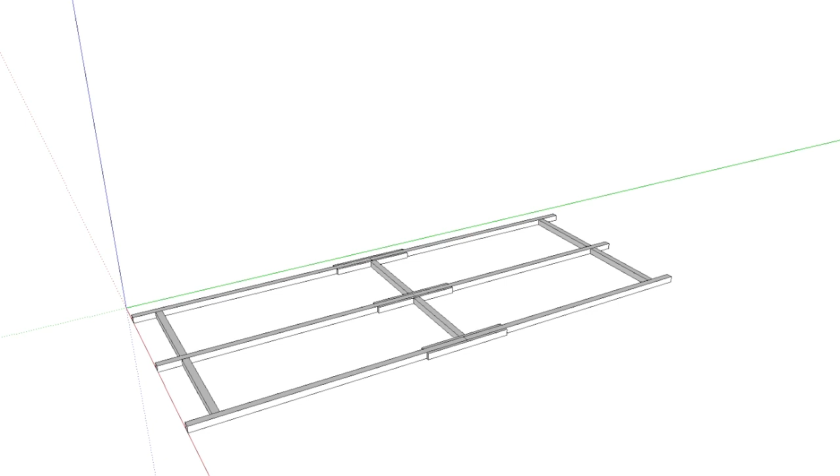So let's dive in. Like I said, the floor is already done. So what I'll show here is, I've got a skid foundation, and on top of that is a joist system and a plywood subfloor. So basically this is where I'm starting from.

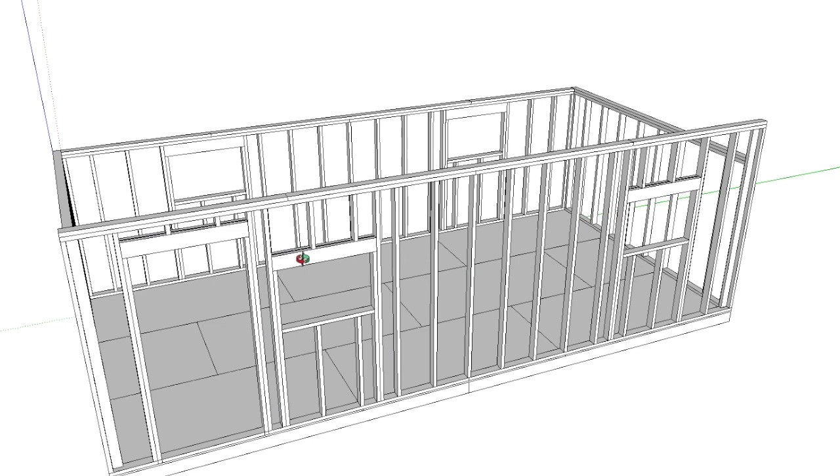So the first step to be done here is the wall framing, which there's a lot there, but I think it's pretty standard stuff, pretty straightforward. This is all 2x4 construction. You've got sill plates, double top plates, or a top and a cap plate. They overlap on seams so that things are jointed, so that it's stronger. Pretty standard openings for doors and windows here. Standard header construction for doors and windows: a piece of 2x6 on either side with a piece of 1/2-inch plywood sandwiched in between.

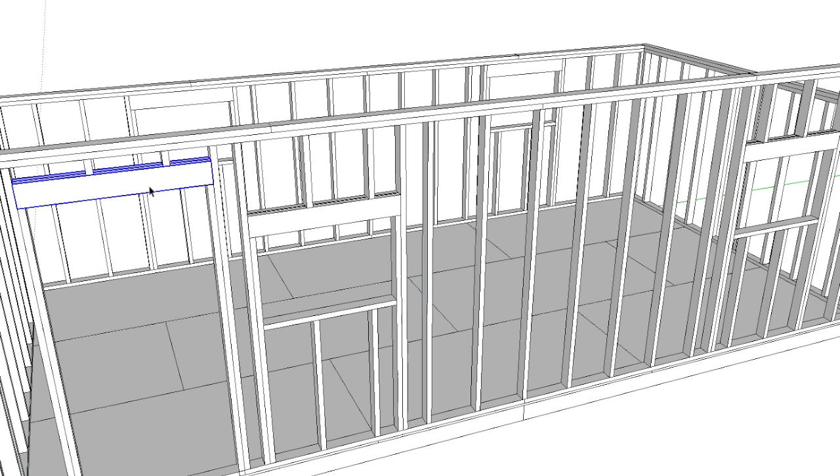Above and below, when necessary, you've got cripple studs above and below windows. On the short wall over here, I actually put the header right up against the top plate. Here's my door opening, kind of the same header. I've shown these — these are the rough openings for the doors and windows I've purchased. But other than that, I think it's pretty standard framing.

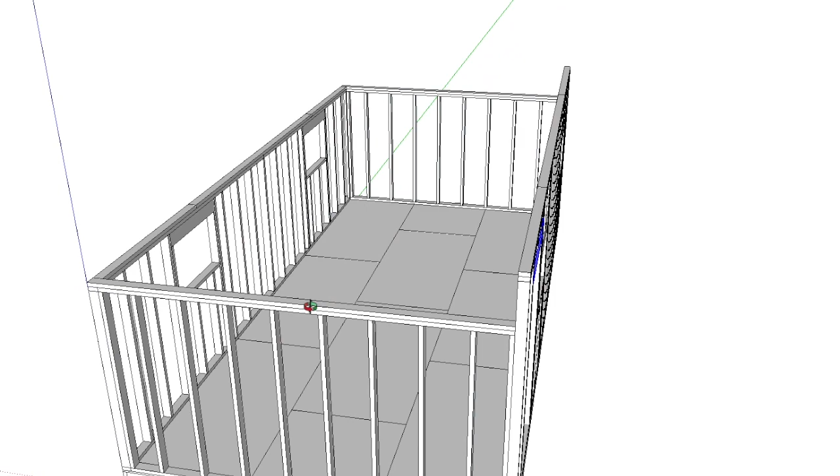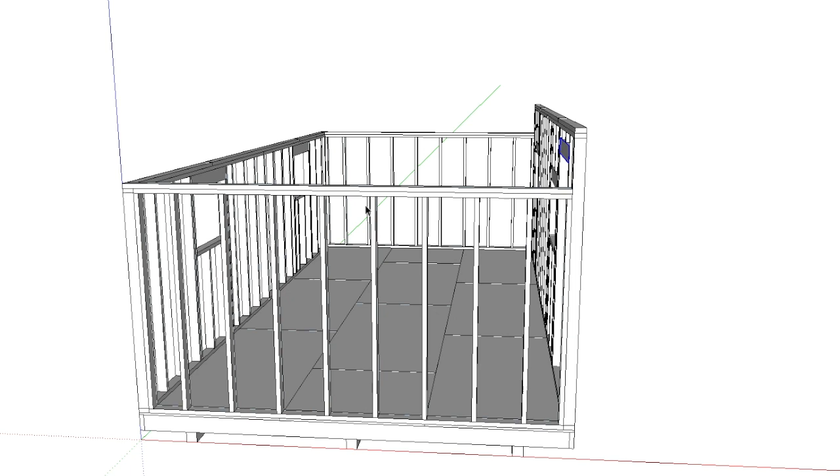I have chosen, this will be a 12x24 shed on the floor. This will be a single sloped roof. So what you can see here from the side is I've got one high wall, which will be the front wall, and the back wall is low, and there'll be rafters running a single slope across. To do that, again, I think there's multiple ways to do this, but I went with 3 short walls that meet up with that one tall wall, instead of trying to make these side walls step up. That introduces several angles and things that I didn't want to deal with. So I went with 3 short walls that meet up with the tall wall.

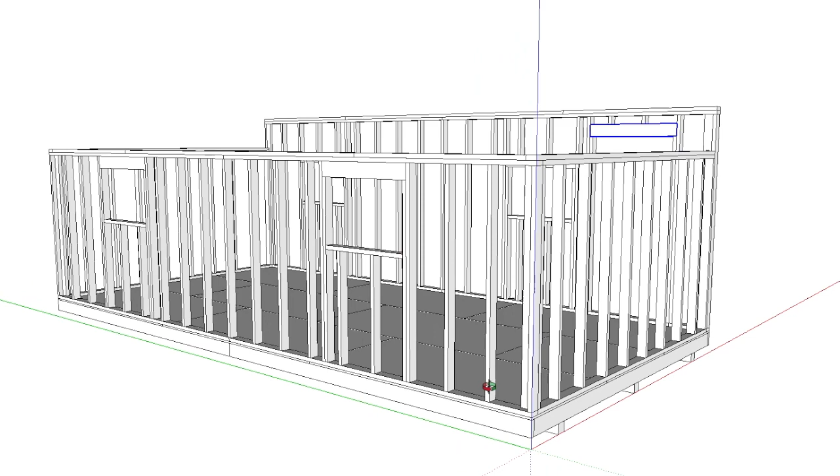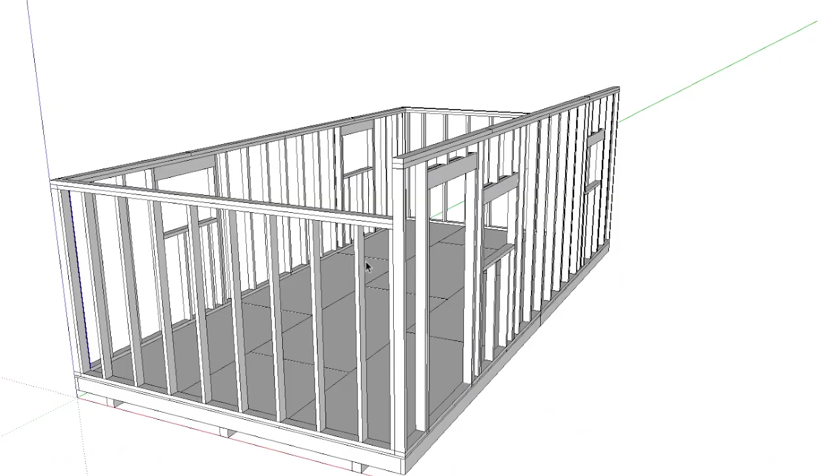There's a little bit of detail in the corners that SketchUp helps people like me visualize, that I hadn't thought about. When 2 walls meet, when you frame out 2 walls, how do you really connect them, and how do you have a nailing surface on the inside? So there's actually, I think you can kind of see it here, an extra stud thrown in on this wall sideways so that this end wall has something to meet up with and nail to, and it provides a nailer on the inside of the room. So there's just a couple little details like that, but again, I think that's pretty standard stuff. If you know anything about framing and if you've read any of that stuff, there are other ways to do some of this again, but I think it's pretty standard the way I've done it.

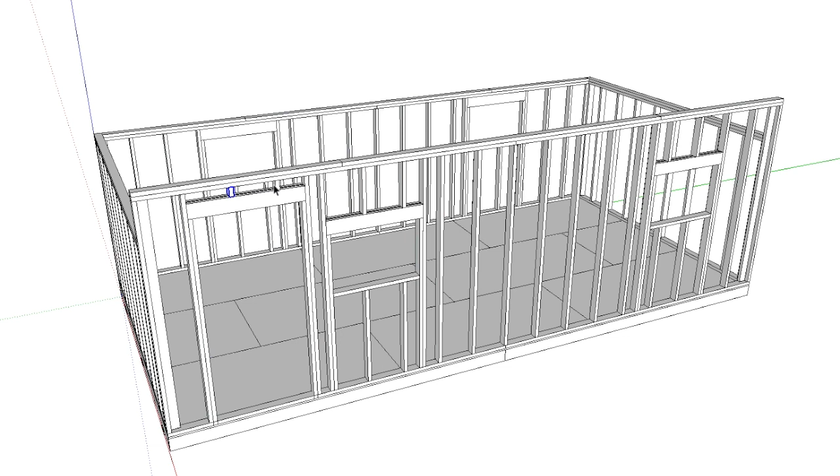So that should cover it. This would all be put together. You've got king studs, jack studs — jack studs come under the headers. Cripple studs, like I said, above and below door and window openings. All pretty standard terminology, I think.

This will be all put together with nails from a nail gun, hopefully to speed that up. I've got a nail gun for this job, but I've never actually used one before, but that should hopefully speed a lot of this up.

But that's it. This is a 36-inch wide door. These windows are 3 feet wide and 2 feet tall. Everything framed pretty standard, I think.

After that, I will put on some wall sheathing. Again, these walls will actually be built kind of laying on the floor and then stood up. That's a pretty standard way to do that. And even the sheathing, which I'll show now, which is 1/2 inch OSB, will be put on before they're stood up on the ground. They'll be put on and then stood up.

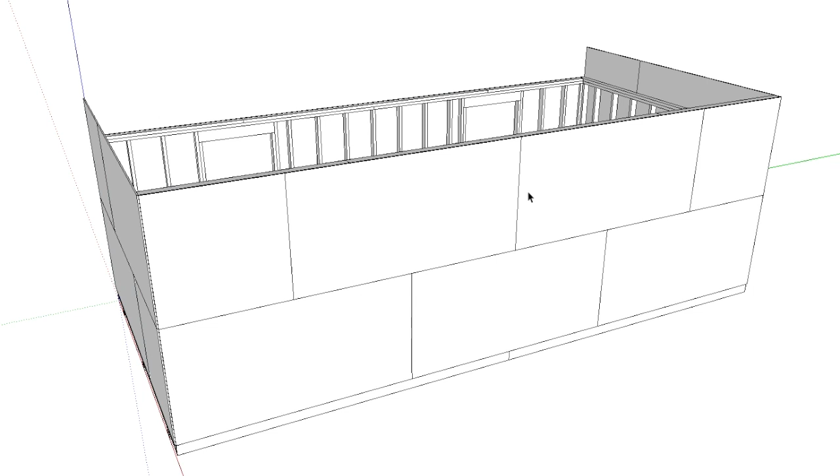I haven't shown all the cuts necessarily down the sides here, but this is how the sheathing will go on, and then after the fact you can actually cut out the openings for the doors and the windows. But that's how the sheathing will go on before you stand it up. So I'll take that away, but imagine that's there.

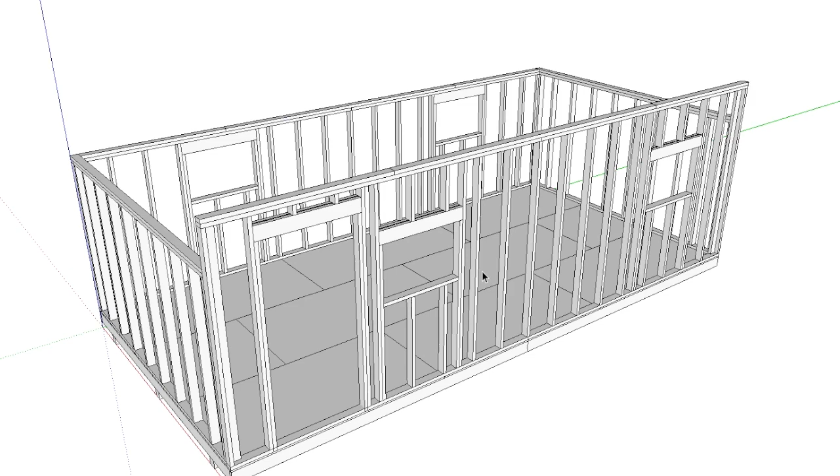After things are stood up and the sheathing is on there, I'll be putting house wrap, either a Tyvek or some other brand of house wrap around the whole structure. And next would be the roof framing.

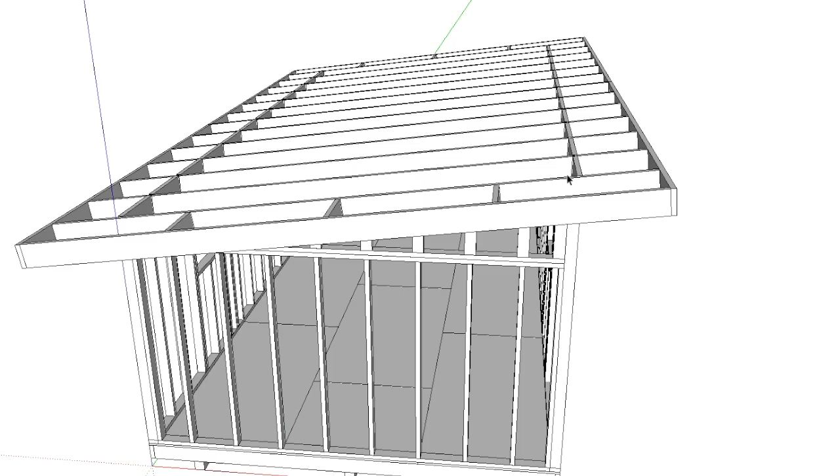Essentially the roof framing is a lot like the floor, with a few differences. Again, I said single slope roof. The floor is 12 feet in this dimension. The roof is going to be 16 feet. So to give about 2 feet of overhang on either side, it'll be slightly less because it's tilted like this, but 2 feet of overhang in the front and the back.

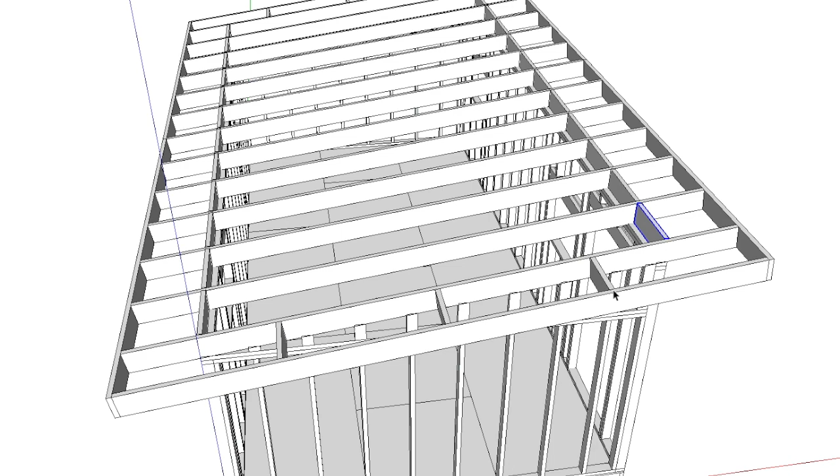That's actually why you can see this blocking that goes along the wall here. It's to close up that gap that'll be created by the rafters above the wall and before the roof sheathing. So there's blocking down there. There's some blocking added to the ends to kind of support this special rafter. I think one name for this rafter is a fly rafter or flying rafter. As you can see, all these rafters are supported by the front and back wall. They sit on the front and back wall, and they'll be notched appropriately to sit on those top plates.

But the end rafters are special. They just kind of hang out in space. So they're supported by the fascia board that runs kind of around the whole perimeter. They're squeezed in there, and this extra blocking here to support them hanging out in space there.

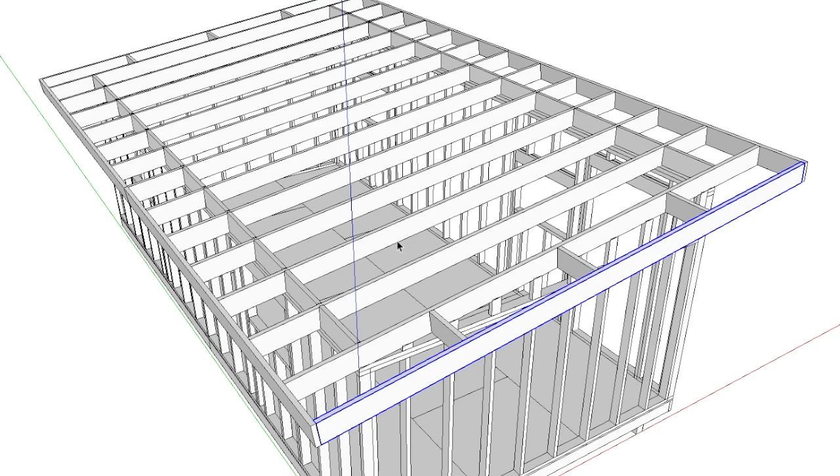But that gives me a total of a 16-foot roof from front to back and 27 feet from side to side. Again, the floor is 24. I'm going about 1.5 feet of overhang on the sides to give a total of 27. That was sized on purpose to fit the metal roofing panels that I'm going to add on the roof. But again, this is 2x8 framing here for the roof, and it's at 24-inch on center, which should be enough support for this roof.

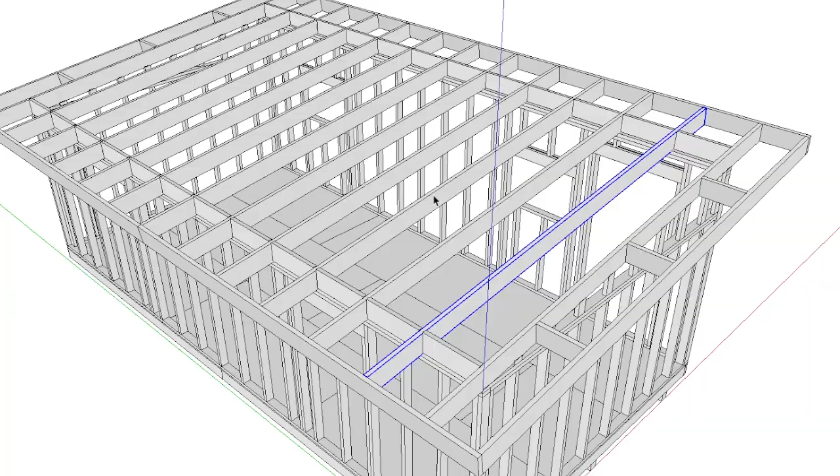Pretty standard, a lot like the floor. There will be hurricane ties where these rafters meet the walls. So those will all have hurricane ties. That's the fastening mechanism, so it should provide a lot of stability there, because we do get some pretty serious winds here. On top of that framing will be sheathing on the roof.

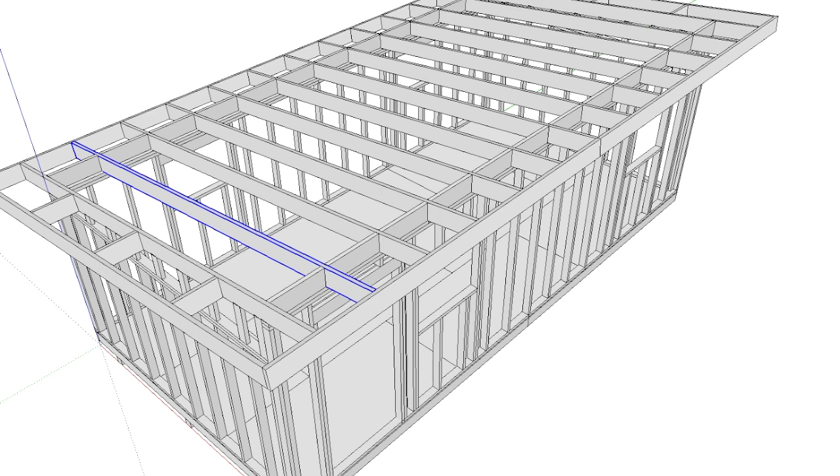This is actually going to be 1/2 inch plywood. It's, again, very similar to the floor build, just tilted. One difference between this and the floor is there won't be blocking for all the seams. On the floor, I put some blocking so that every seam of every piece of plywood would be supported. On the roof, instead, it's done a little differently.

I use something called either sheathing clips or H-clips between these panels. In one direction, the direction that the rafters run, all these seams will fall on a rafter and they'll be supported. But this other direction, each of these seams is kind of unsupported between the rafters, so there's 24 inches of kind of unsupported space here.

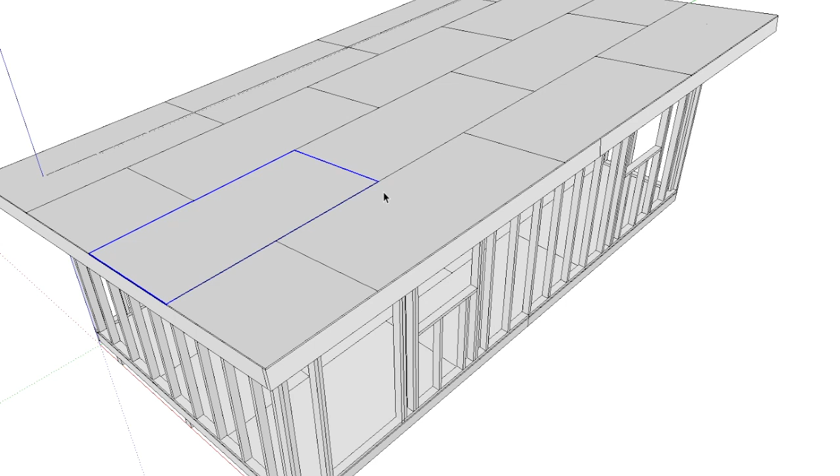So those clips that I'm talking about serve two purposes. One, they provide a little support in that unsupported space, and they also space out these panels so that they can experience the expansion and contraction that they do as with the weather. So there are clips that go between these panels to give that extra stability and expansion and contraction space. So that's one difference between the roof and the floor. But other than that, the roof and the floor are actually pretty similar structures.

So that covers the roofing framing. On top of that will be tar paper or a synthetic. I'm actually using a synthetic paper on top of this to go underneath the metal roofing that will go on top.

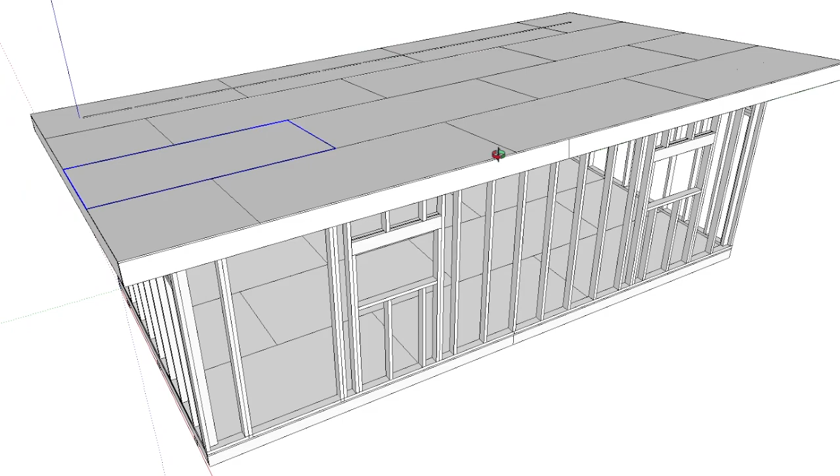One little detail: because I chose to make 3 low walls meeting up with this one tall wall, I've got some additional cripple studs here, I think that's the right name for them. They're not really there for support, since there's a rafter running on top supported by the front and back wall. They're really more there to nail to—nailers for the sheathing and siding that will go on the outside of the building.

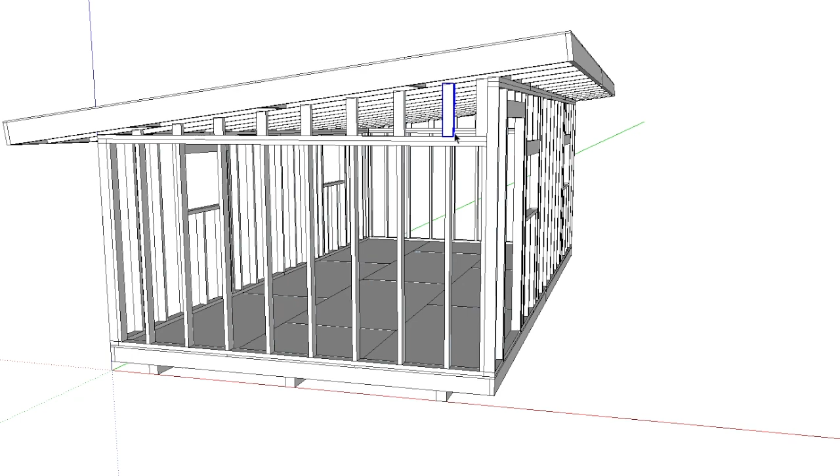That's how I've kind of bridged that gap. If I didn't put those there, there'd be a big empty space with nothing to nail to, so those are just there as nailers. They'll have to be cut to the appropriate angle to meet up with the rafter, but I think that's pretty much all the detail necessary there.

Some statistics: that roof is 16 by 27. The math says you can collect about 0.62 gallons of water for every inch of rainfall for every square foot of roof surface. Doing that math, with our average rainfall ballparked at 12 inches a year—it's anywhere from 11 to 13 or 14—that gets us about 3,000 gallons, roughly, of water off this roof over the course of a year.

So a nice size, 2,500 gallon or so tank on the side of this thing should give us a good chunk of our water needs collected off this roof. That's another purpose of this shed—it's going to start out largely as a storage shed to keep some of our things dry before the house is built, and it'll also serve as a workshop and other miscellaneous things.

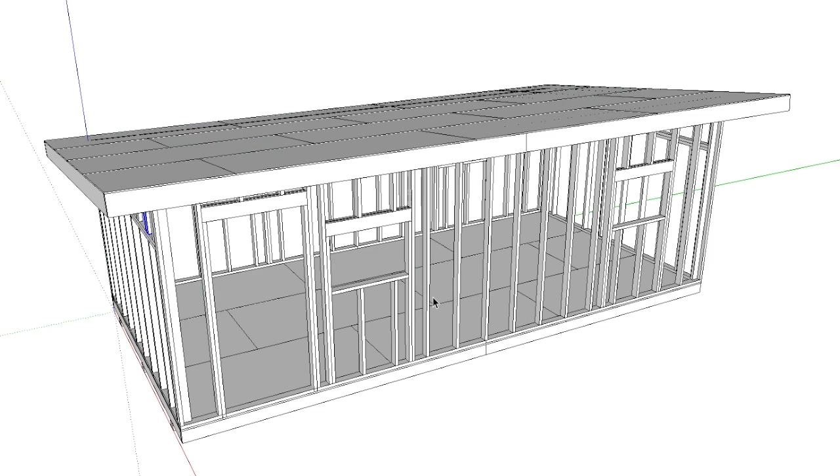Someday down the road, when the house is built and we pull some things out of it, it'll become maybe more of a serious workshop, and who knows what else it could turn into. Hopefully it'll last a long time, built this way—I've chosen pretty standard building techniques that should be durable and strong. So hopefully this will last a while, but feel free to comment on anything you see that's out of whack there. I'm just checking my notes to see if there's anything else to cover.

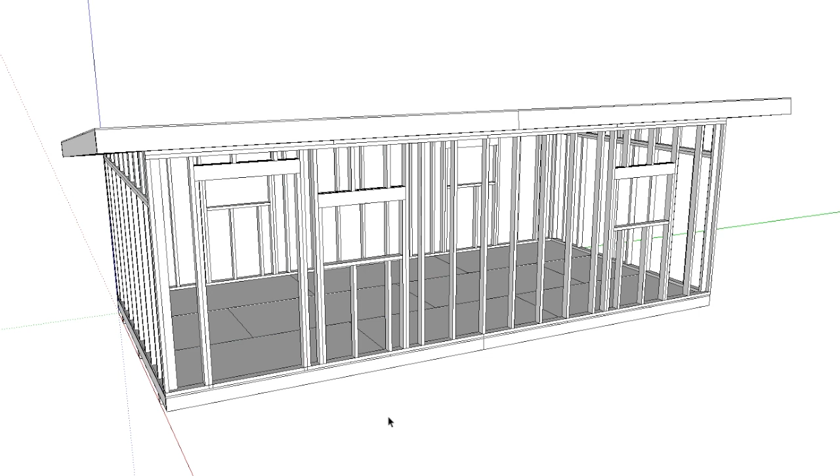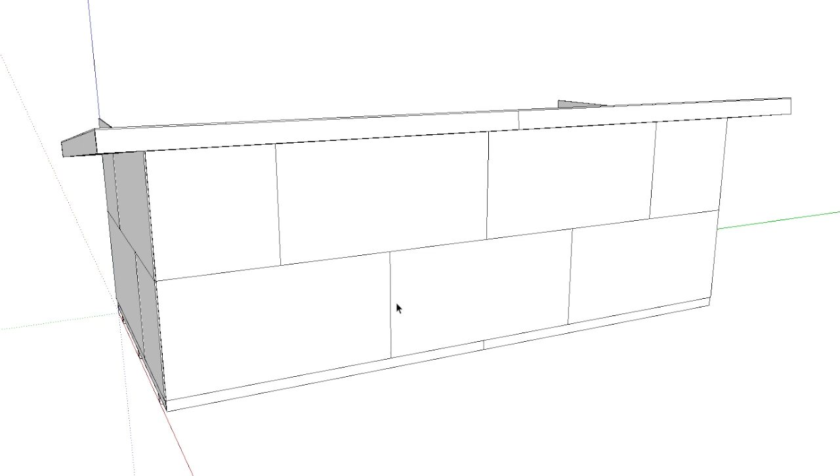On top of the wall sheathing I showed earlier, which runs side to side along the studs with cutouts for doors and windows, there will be a siding called LP SmartSide. It's an engineered siding that will go on, and essentially the sheathing runs side to side here while the siding will run up and down, again cut out for the doors and windows. This siding is pre-primed and just has to be painted.

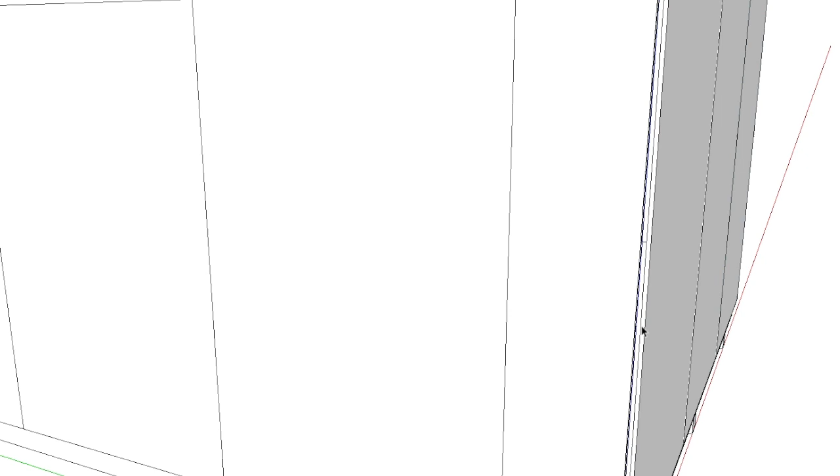So that's what's going to cover around the outer edges. One thing I've got to figure out is what happens where the sheathing and siding create a corner—maybe I just leave some of them a little longer so one overlaps the other. Otherwise you've got a little gap there, and I suppose there are some trim pieces that need to be put on. I haven't really considered trim yet around all the doors, windows, and corners, so maybe trim is the answer. If anybody has suggestions on how to place this siding and sheathing, or what to do after the fact to get a waterproof corner, let me know—that's something I haven't resolved yet.

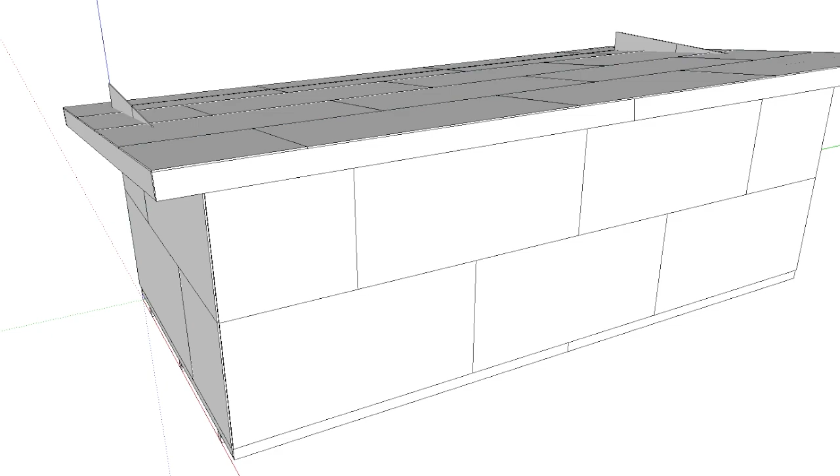But I think that covers the whole setup. I tried to give you enough detail but not go on too long—I actually taped this once already and it came out about half an hour, so I went way too long. I tried to shorten it up a bit. Hopefully that gives you the details you need to understand where I'm going with this.